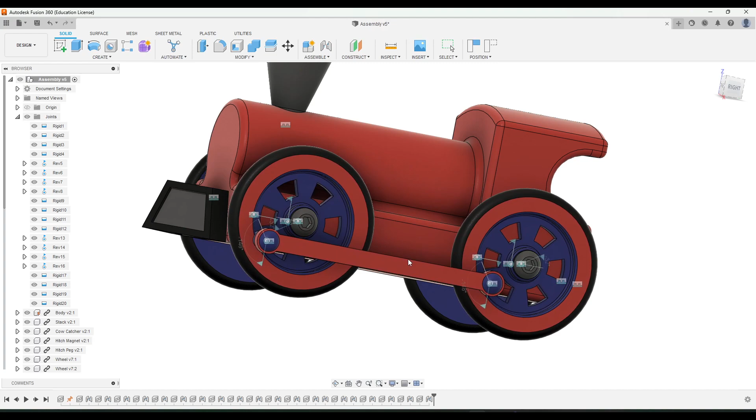This will be the final train assembly video. We're going to set up our train motion so that our wheels move together, and we're also going to solve a problem that our train assembly currently has: sometimes when you rotate your train wheels, the linkage arm will actually go at an angle like this, which would not work well to allow the train to move in real life. So we want to make sure this linkage arm always stays horizontal by allowing the wheels to move at the exact same time and in unison.

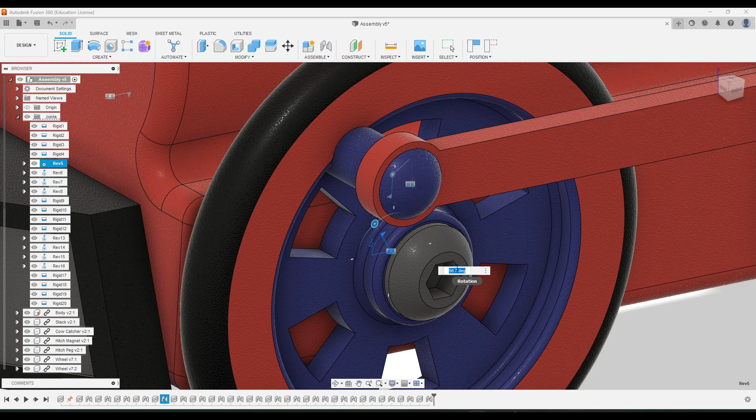So we're going to use a motion link for this. Before we do that, we're going to define the position of this linkage arm at 0 degrees. Zoom in here so you can see, and click on the revolute constraint or revolute joint for our wheel and the body. You'll see a blue flag looking thing with degrees on it. Double click on it and make that 0 degrees. Notice that moved it to the forward position. If I do the same thing for the back wheel, it should have set that to 0 degrees as well, which it did, so I'm going to leave that at 0.

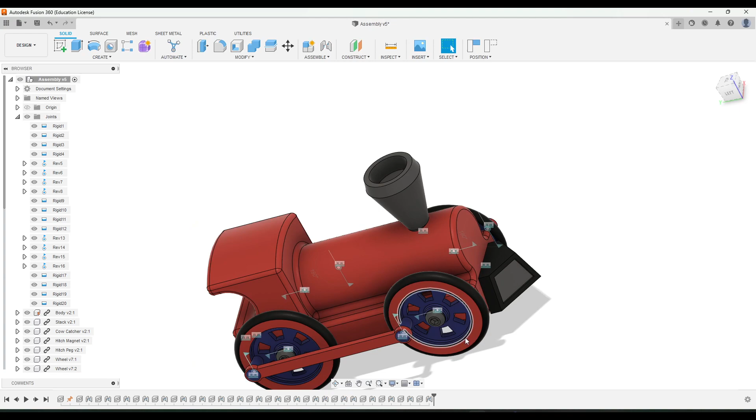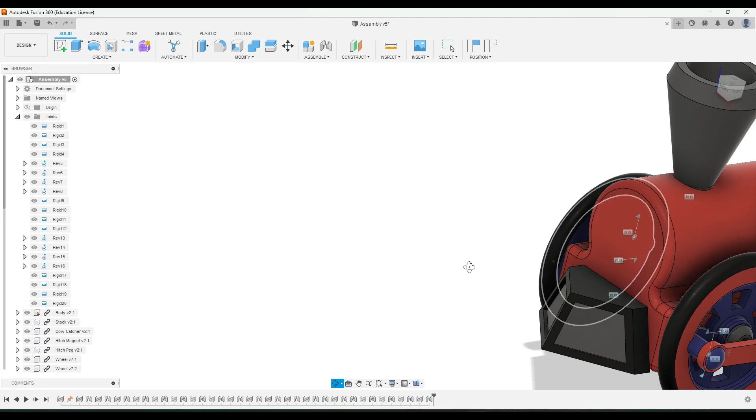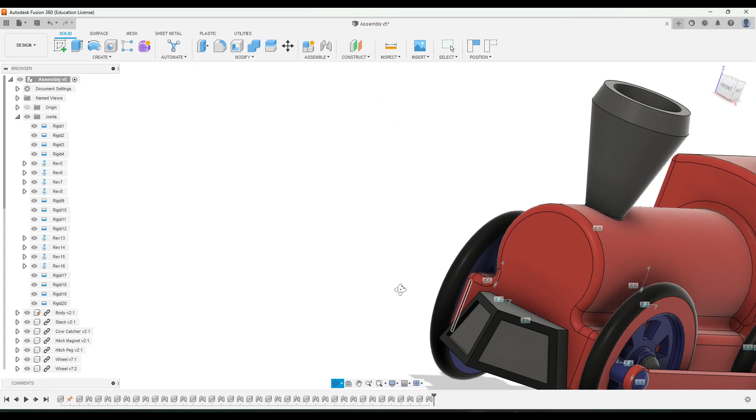Let's flip it over to the other side and do the same thing. Zoom in and click on your revolute constraint. That one is actually at 0 already, I think I did that before, so just make sure that's set to 0. You'll notice this one, when set to 0, moved it to the back position. Really what you want is for one side of the train to have this linkage arm in the back, like this one, and the other side to have it in the front like this. So you might need to make one 0 and the other 0 like I have here. If that didn't work, if they're both forward or both back, you might need to make the other one 180 or negative 180. Just make sure one is in the rear position and one is in the forward position as you see here.

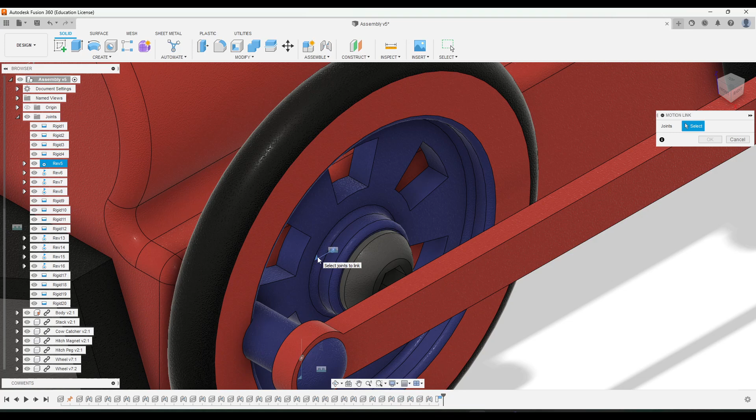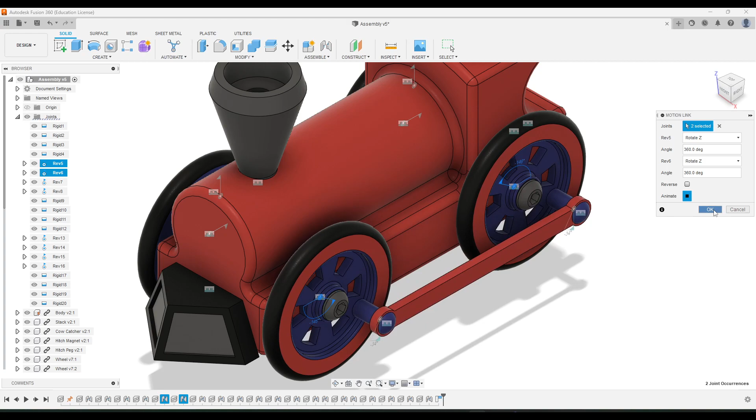That will solve that angular issue with our linkage arm. Now if we move this by hand, you'll notice it will never get at an angle like that anymore. These are going to move in unison because it links the revolute constraint or revolute joints between both wheels.

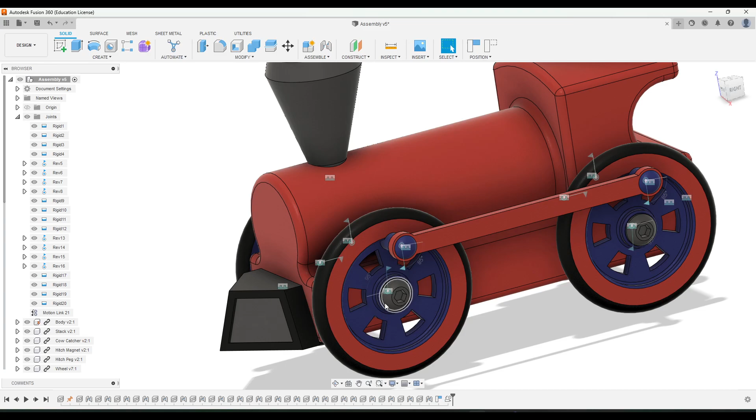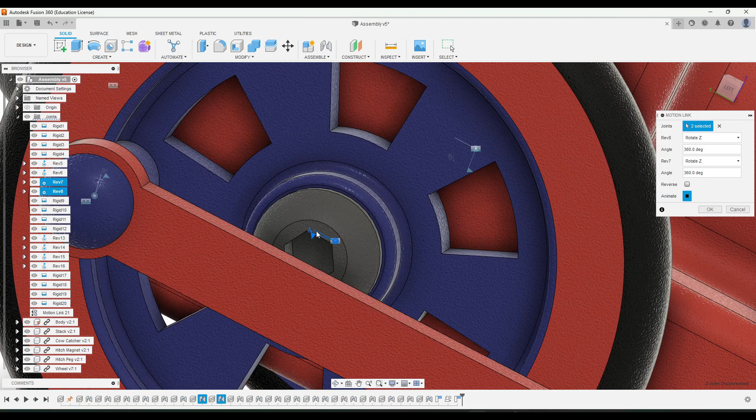Let's flip over and do the same thing on the other side. Go to Assemble, Motion Link, Capture Position, zoom in, and click on both of the constraints for the front wheel as well as the back wheel. Again notice mine is moving backwards, but if I click reverse it's just not going to move at all. So I'll leave it like that and click OK.

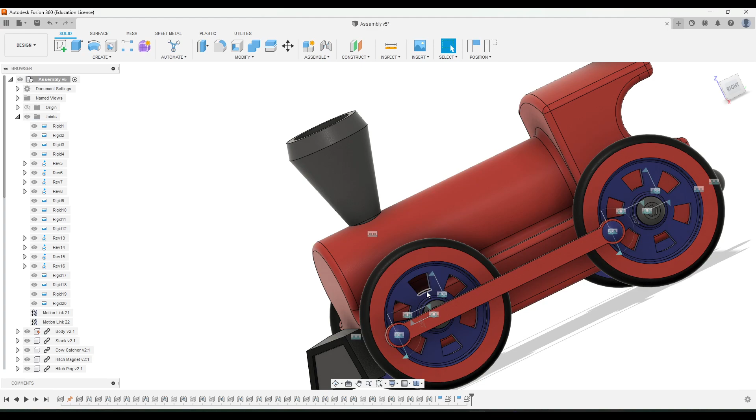I'm going to reset this back to its default position of 0 degrees, so it's in the forward position again. Then we're going to add one more motion link, this time between both front wheels, to tie the motion together so that when we turn one side of the train, the other side turns as well.

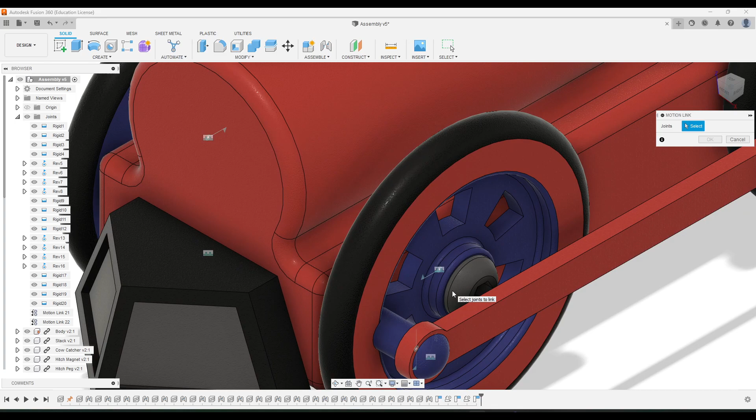We'll go to Assemble, Motion Link, Capture Position, and this time I'll click on the revolute constraint here on this side, then flip it over to the other side and click on that one. You'll notice both sides are turning at the same time, but this one here is moving backwards, and my other one is also moving backwards. If I click reverse, this one is moving forwards, and this one is now moving backwards.

You want to make sure you click on the option where both wheels are turning the same direction. For me, that's with this reverse option unchecked, so both wheels are moving backwards. Obviously that's going to allow the train to move backwards, not forwards, but that's fine. Just make sure you select the option where both wheels are turning the same direction. If they're moving forward, that's good, if they're moving backward, that's good too, but make sure you don't select the option where they're moving in opposite directions. I'll leave mine the way it is, and then click OK.

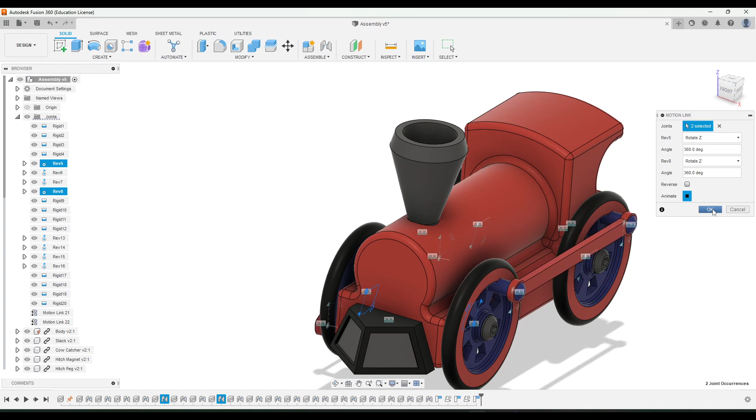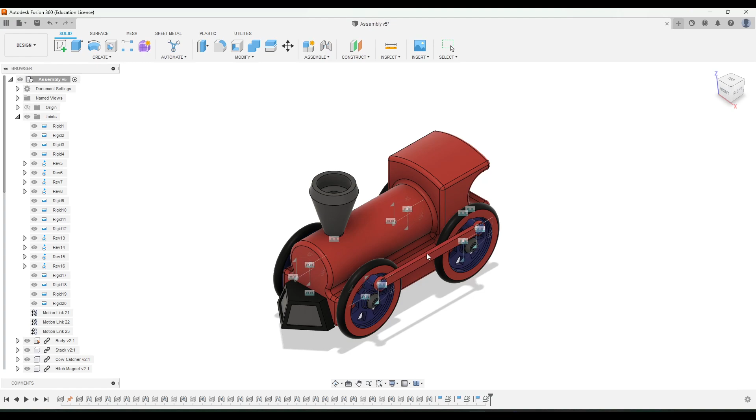Now if you turn the wheels, you'll notice both sides will turn in unison with each other. That will finish up our train assembly. In the next videos, we'll get it on the track and start animating it so that it looks like the train is moving with the wheels turning as it's going down the track.